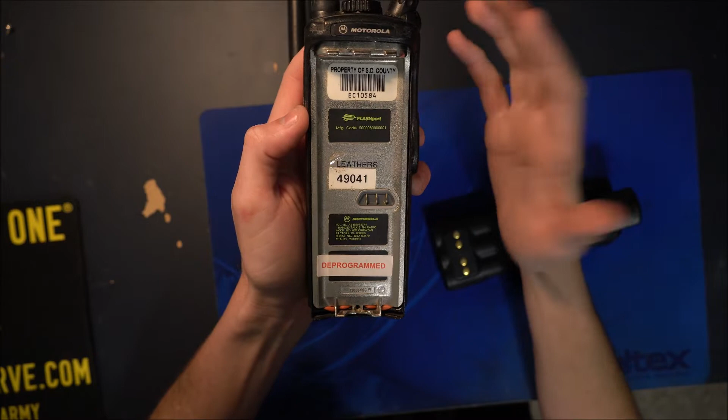This one has been flashed, but they removed the sticker that tells you what flash version it is. Interesting enough, when you see this sticker that says 'I've been flashed,' that's not from the factory. From the factory it's a black sticker that shows Motorola. This icon or sticker shows the most recent flash code - it says flash port manufacturer code, and then gives you the digits. That's pretty much what you get from the manufacturer.

But when you send it out to a third-party company, like a radio company or some other people that do radio flashes, you will see the sticker on it that says 'I've been flashed.' That basically means they updated the flash code. So the original flash code that came from Motorola has been updated to a newer standard or version, and the probability of it having more bells and whistles is a lot greater, because usually when they reflash it, it's to upgrade certain characteristics of the firmware.

Alright, so let's get to it. So what you're going to need for programming these radios is an old dinosaur laptop or desktop, doesn't matter.

The key with the computer is it has to be running Windows XP. If it's not running Windows XP, it's not going to work. The program will boot up, but it will not recognize the radio at all. I don't know what that is caused by, but it's just the way it's been for a while.

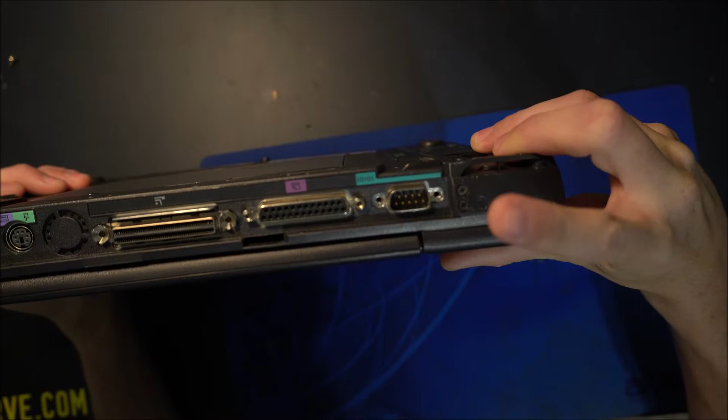Preferably, if you get a computer that has a serial port on it already, then you're pretty much in the ballpark of where you need to be. So a serial port is nice to have. If you don't have a serial port, it's not a big deal. You can buy these on Amazon for like $10, and it's a USB to serial port adapter, so it's the same port as the one that you need.

As far as programming cables, we have this guy right here. I went over this in the last video. This is a serial to XTS 3000 radio adapter. I believe this will also work for the XTS 5000 and 2500. Do I have proof that that works like that? No, but I'm pretty sure it does because the pinout is the same. Notice there's no rib box in the cord, and I said that in the last video. There's no need for a rib box. Just go buy the serial to radio adapter directly.

So we're going to turn the laptop on here. This laptop is so old the battery doesn't actually work, so it has to be plugged in at all times. The only thing I use this for is programming Motorola radios. It does not get used for browsing the internet because it is ridiculously slow.

Alright, so when you get the computer all booted up and ready to go, you're gonna take the serial port and go ahead and plug that back into the back of the computer. Then you're gonna place the radio side of things here. You're going to plug in the adapter to the radio, like so. That's what it's gonna look like once you have it connected.

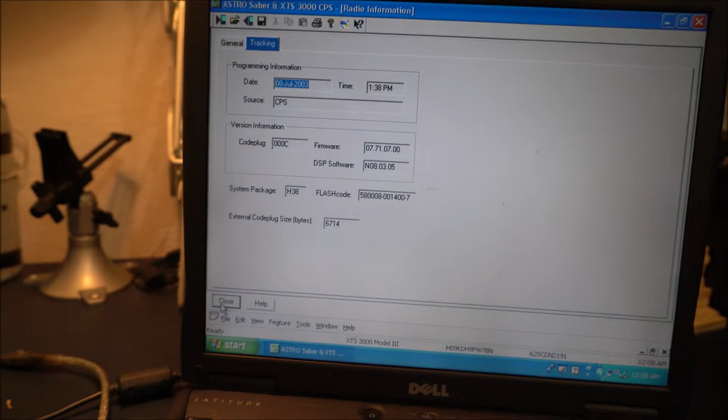So that's all you can do with the first tab. I'm going to go down here to the bottom left under close, and go to radio configuration. This is a really important tab.

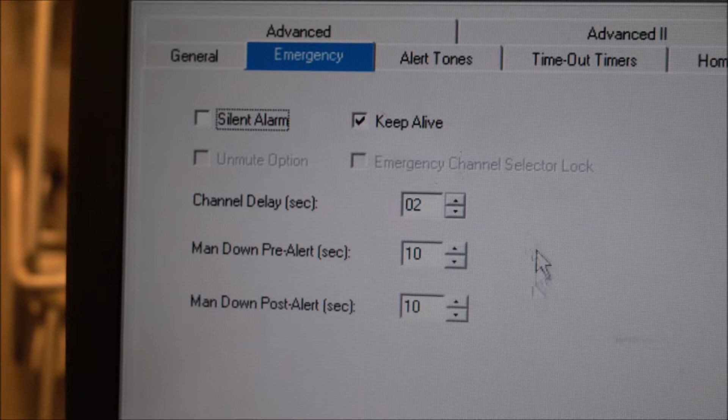So under radio configuration we have radio wide. Radio wide is pretty much your general options, TOT timers, which is timeout timers, tones, emergency systems. Right here, you can dictate what the radio is going to do when you hit an emergency button or an E-tone button.

Normally, for a firefighter or officer, the emergency button is this orange button here. But this orange button can be programmed to do anything I want it to do, and we'll go into that here in a sec. So, depending on the department, they have different things.

We have surveillance mode. Never going to need to use this, but what this does is, let's say I am a surveillance guy or I am investigating a case and I need to be very discreet. I can disable lights on the radio, which means that when I touch the keypad, the lights will not turn on.

I can disable tones. What that means is when I click a tone or I click a button, you hear that tone - it will turn that off. And then disable internal speaker audio is another thing that you would have off. What that does is it disables the general speaker on the front of the radio, and it will only output audio through a microphone or a headset.

So if you're doing investigations or you're an investigator or something, this is what you'd want to use. This would keep you very quiet - it would not make any noises. Right now it makes all sorts of beeping noises because it sounds cool.

Home mode - this has to do with, I believe, more of a trunking thing. But this is also, so if I click home mode, it will automatically give me an option to select which zone and channel that this will resort to when I turn it on.

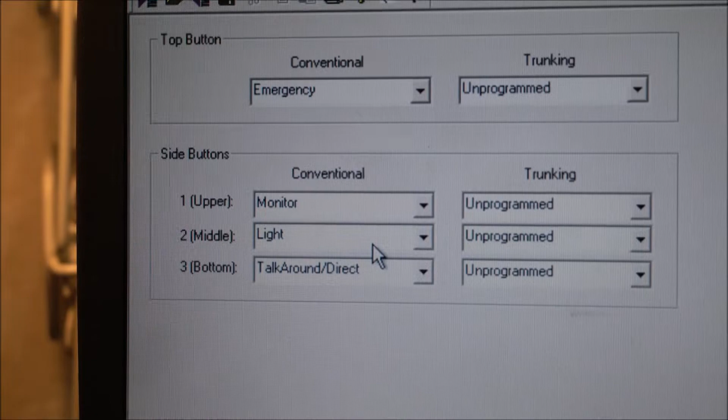So on conventional, which is what I'm doing, the top button, which is the orange button on the radio - I'm going to take off the antenna so I can get an easier view here. So the orange button is the top button, so that's my set to emergency.

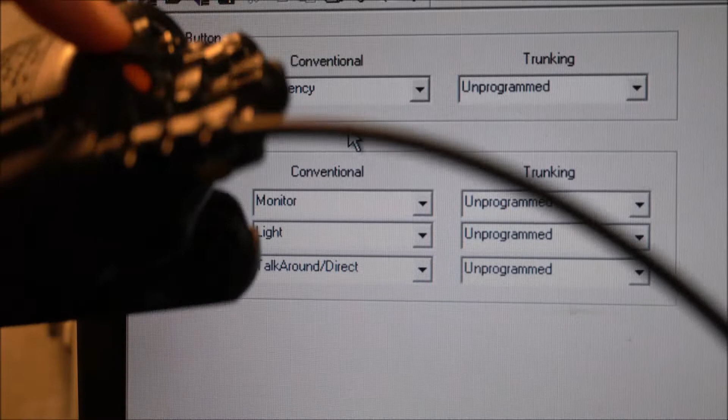Now check this out - let's say I don't want that to be my emergency button, I want it to do something else. I have all these options to set. So I can set this to phone, and what that does now is if I click write to radio, when I click that orange button, instead of activating an emergency tone, it's going to activate my phone patch on the radio. So I keep mine on emergency, but you have tons of different things here.

So we have light - light just turns on the backlight on the radio. Monitor monitors frequencies. Obviously, talk around direct is direct, which means non-repeater. Emergency mode. Phone, like I said, dials a phone number or opens it up for auto patch. Unprogrammed, which doesn't do anything. Select call, which basically answers a call when you get a call on a trunking network. And there's just tons and tons of options here.

I'm not going to go into all of these, but that's just generally what they do. I'm going to change this back to emergency.

Okay, so then we have side buttons. The side buttons, you'll see upper, middle, and bottom. On the radio here, we have upper, middle, bottom. So that's pretty simple to explain.

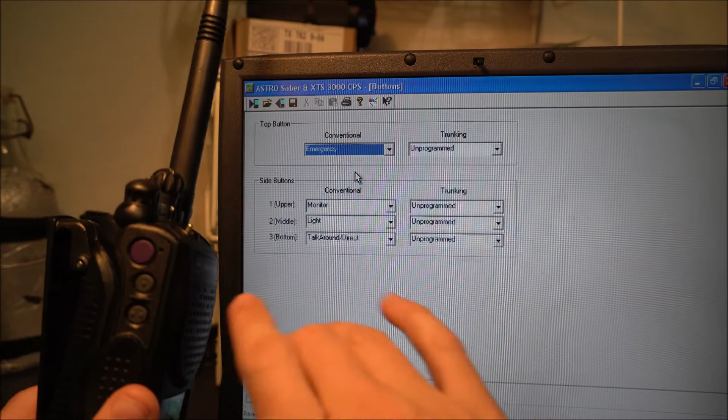So basically what I have right now is when I click number 1 - let's turn the radio on and let's go through these. Once you read the code plug on the computer, you don't have to have the radio connected to the computer. My upper button is monitor. What that means is when I click my upper button here and hold it down, the radio will openly monitor analog. This button is set to monitor, which it's going to bypass the squelch and you're just going to hear white noise.

My second light here, or my second button, turns on my light. So right now I have no light. Hit the second button, my light turns on and off.

So when I click on 3, or my third bottom button, you see a little icon that opens up, and it's really hard to see on this camera. This little line with an arrow means that when I transmit, it's going to go to direct mode, and it's not going to go through the repeater. So whatever your receive frequency on the repeater is, it will transmit only on the receive frequency, and it will not do your offset when you have direct on.

So basically, this is simplex. When you click this button here, the way I have it set, you're turning the simplex option on and off. So that's all the buttons - they're not that difficult. Like I said, each button on this system on the radio can be programmed for different options. That's just what I have mine set for. So close that out.

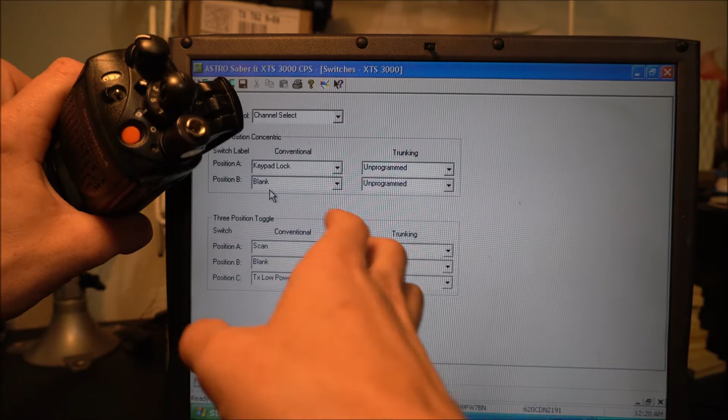Anyway, there's a better view of it, so you can see what I'm moving. You have a thing here that looks like an O, and on this side an O with a cross through it. That's mainly for secure net, which is what Motorola prefers it used for, but I'm just using it to lock out my radio. When I have this set to my left position, the number pad is completely locked down and I can't press any buttons, which is really nice because when I'm running around with it on me and I hit something, it doesn't change a setting.

So that's what that is for, and you can change it to do multiple different things. Like I said, I have keypad lock right now, but you've got zone select, scan, unprogrammed, blank, PL disable, change to low transmit power, scan list, mute, secure TX, which is what it was originally on.

3-position toggle. You see here, 3-position toggle A, B, and C. So we have 3 little positions here on the radio: A, B, and C. And we have a toggle switch that will actually click into 3 different positions. So here's 1 in A, 2 in B, 3 in C.

Once again, fully programmable. We can change what every little button does on this. So right now I just have my position A to scan the zone, position B is blank, and position C is TX low power. That's what I've set everything to. This isn't trunking, but it's the same theory - you can program any of these in for trunking.

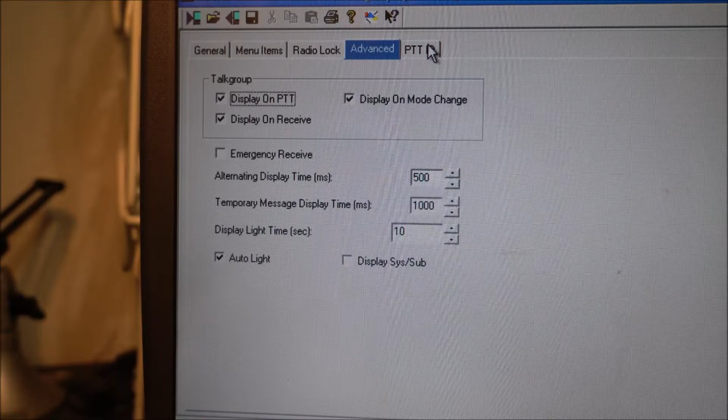So this is pretty simple, don't get overwhelmed by it, there's really not much to it. There are 2 different options for people who like different methods of programming. So if we double click on conventional personality - a conventional personality is an actual physical channel, it is not a zone. A zone and a channel are 2 different things.

A personality is a repeater pair. For example, my repeater here at the house is 440.625, my transmit to the repeater is 445.625, and my PL is 103.5. So that would be a personality.

The personality holds - let's go to the information here. When I click on a personality that I have set, you can see I have my frequency in megahertz to receive on, and my transmit frequency that will be transmitting to the repeater, and that usually is the one with the offset. So a personality is a channel or frequency pair, and a zone is the group in which those pairs or personalities are being stored. We'll get into zones in a second.

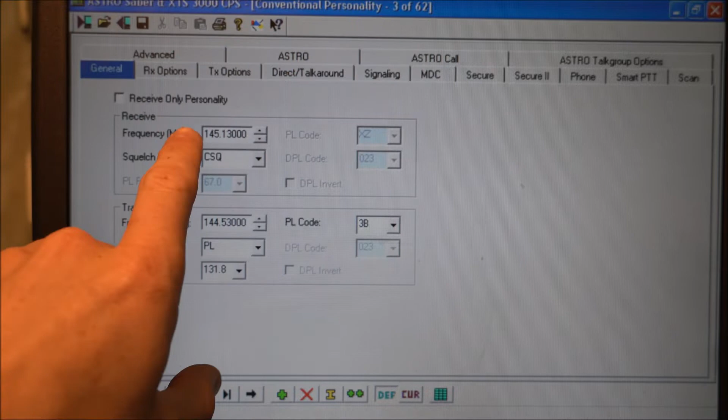So we're going to go through the two different ways of going through the channels. First mode we have is basically tabs - I don't use this often, I prefer the chart, it's kind of like an Excel doc almost. But if you prefer this, it's pretty simple.

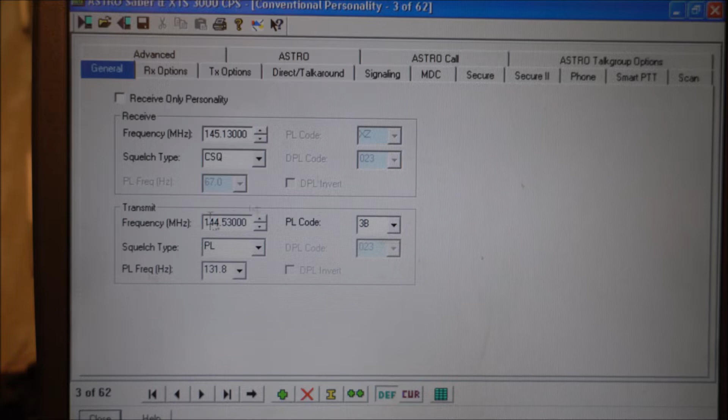Let's go ahead and I'm going to program a repeater frequency that is pretty local to where I am. We're going to reprogram this personality, and I'll show you how to do it from scratch.

So close this - here's all my personalities. I usually like to click on the last one, it doesn't matter. Down here on the bottom, you will see this little add button, this little green cross adds personalities to the radio. If I click this, it's automatically going to add a channel.

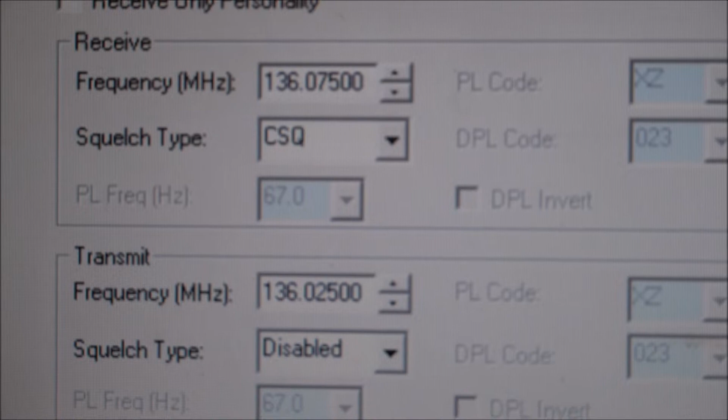By default, the channel is always set on this radio for 136.075 and 136.025. However, that's not what we're needing to program into the radio. So my receive frequency on this repeater is going to be 145.130, and let me see what my transmit frequency was.

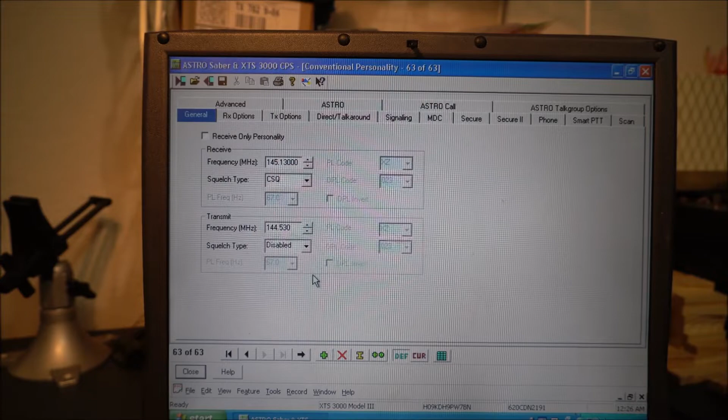144.530. Okay, alright, so my transmit frequency is 530, so there we go. I just typed in the repeater pair. So the radio is going to receive on 145.130, and then the radio is going to transmit to the repeater on 144.530.

Now, squelch type, we're going to go down here to PL, because that's what this repeater takes. And the PL, I believe, is 131. Oh, we got 131.8, I believe, is the PL.

So PLs also have what's known as a PL code, so these are dependent on each other. Whatever you type in for one will change the other, and if you type something in for that, it will change this. I don't know what the PL code definitions are, but I know the PL frequencies.

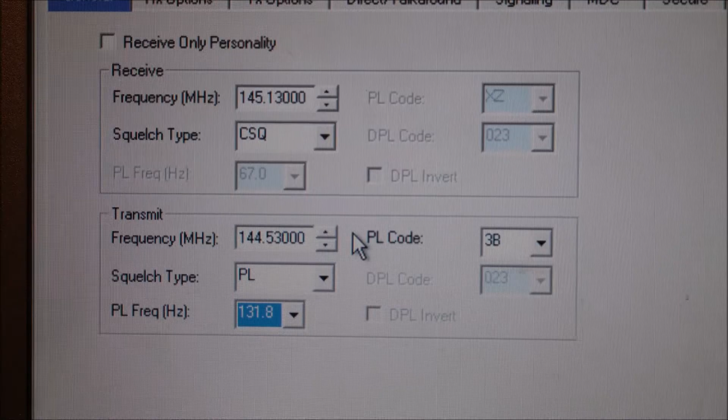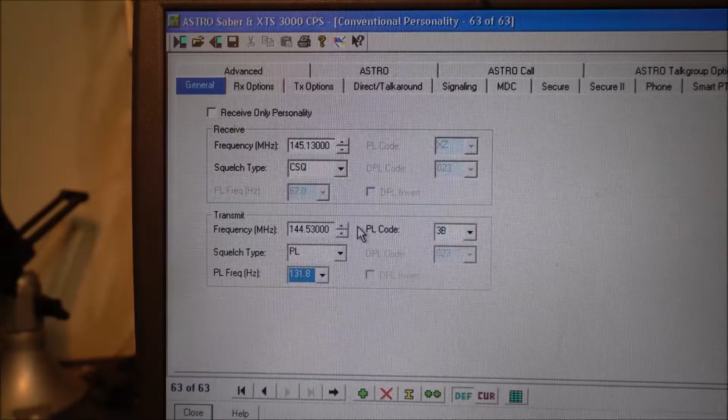So we're pretty much done programming this repeater, but we're missing one major thing here. We programmed the radio to operate on this repeater. However, if I was to program the radio right now and send all this data to it, it would not find this, because we have not assigned this to a zone. So right now this is kind of in the radio, but it's not accessible to the user yet. To assign this to a zone, we have to remember this number down here.

So this is personality 63. Total personalities in the radio is 63. So we have to remember that this is personality 63, and you're going to figure out why here in a sec.

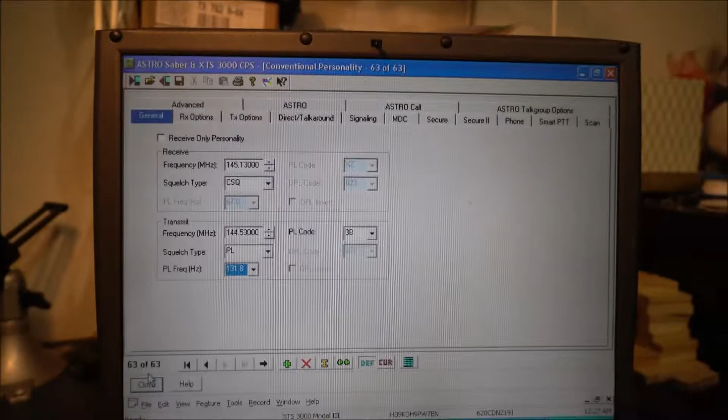Now, on the conventional channels, we cannot program the name of this personality just yet. That will be done when we get into the zones. So we're going to go over to the zones here real quick. On the bottom, underneath personalities, you see message alias, status alias, MDC, scan, zone, channel assignment. That's what we want. So here I have all my zones.

We're going to go ahead and click the bottom one, and add a new zone. So this one, I'm just going to call it TST for test, or video. Let's call it VID for video. So here's video. All right, close. Or actually, don't close it yet.

So we named the zone. We'll go over how you see zones in the radio. Now we're going to go up to channels. As you can see, there are no channels yet assigned to this zone that we have just created.

So our personality type is conventional. Once again, we have conventional and trunking. We want to stay with conventional. Personality, remember that number 63? That's what we need to remember. What this does is, this personality number refers to all personalities in the radio.

So we're going to go down to personality 63, which is what we were using. Click on personality 63. Now we have told the radio in this zone we want to use channel or personality 63, which is that repeater we just programmed in.

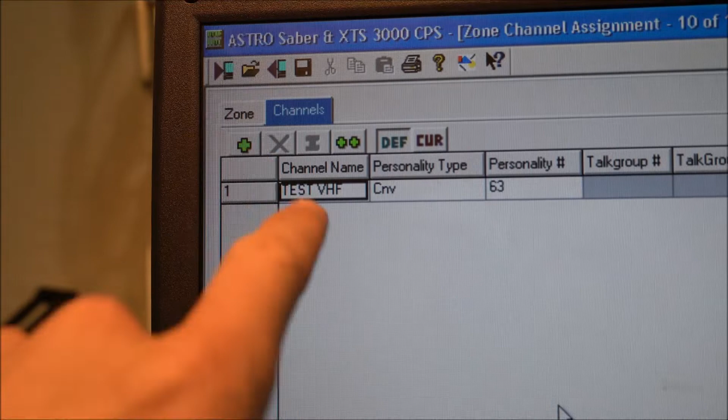The personality type is conventional, we are not doing trunking. Personality number is 63, which is the channel we just programmed in the personalities. Okay, so now we're going to close all that out. Basically, we just programmed a brand new zone with a channel.

So if I go to my radio, same thing, I'm going to turn the radio on. The radio's already plugged into the programming wire. So radio's on, it says radio locked.

Now we're going to go back over here. We're going to go to, so this was our read button, this is our write button. So we're going to go ahead and click on write.

The radio beeped, recognizing it's taking data, and it will also say 1 CSQ here. Once the radio is done, it will actually give you a notification on the screen. Right now it says, verifying that the device can accept the current code plug. Using port COM1. The radio has completed. Astro Saber XTS 3000 CPS. Write successful. So now the radio has turned on.

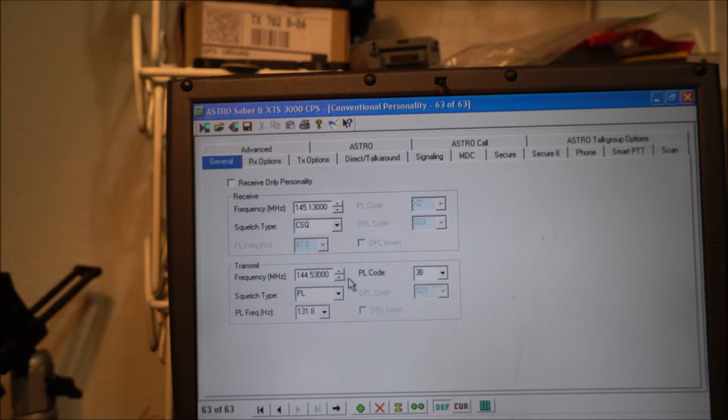So we're going to go back down to personality 63. Here is our analog personality that we just programmed. And now, instead of going through this tab section, we're going to open up the chart view. The chart view is what I use to program frequencies. It's just a lot easier to see things.

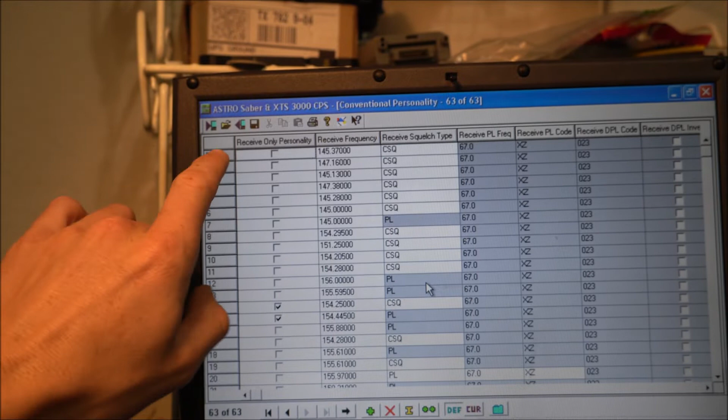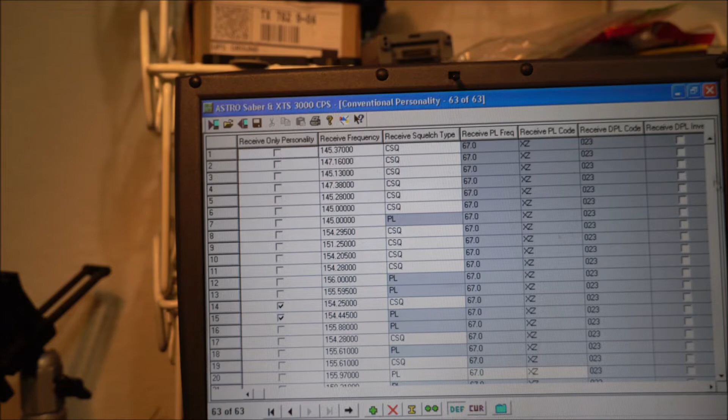Takes a while because I have 63 channels. So here it shows all of my personalities designated by a column ID or personality ID, and it also shows my receive frequencies programmed in for each section. So if I go down here, we'll see at the bottom that 145.130 frequency that I just programmed, which is channel 63.

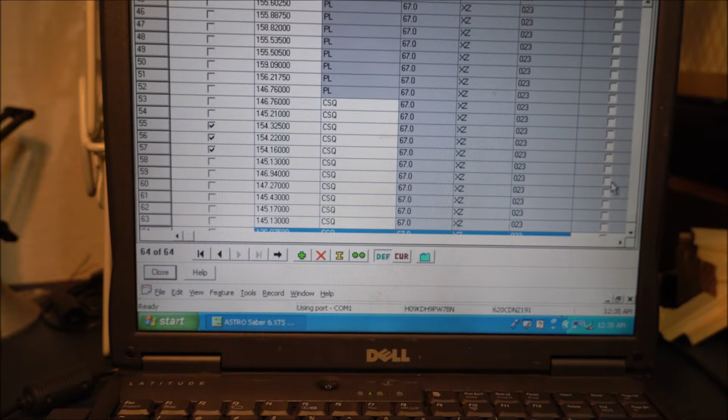So we're going to add 145.130, but we're going to add this in P25. I'm going to click the button down here again, which is the green cross looking button, and it's going to add another channel. Again, the channel defaulted to 136.075. That's just what the radio does.

So on the receive frequency, which is right here, their column tabs are up here. So we have receive-only personality, which you only highlight receive personality if you're doing scanning. So I got receive personality, receive frequency, receive squelch, PL, all that. There's tons and tons of tabs. We'll go through the basic ones here.

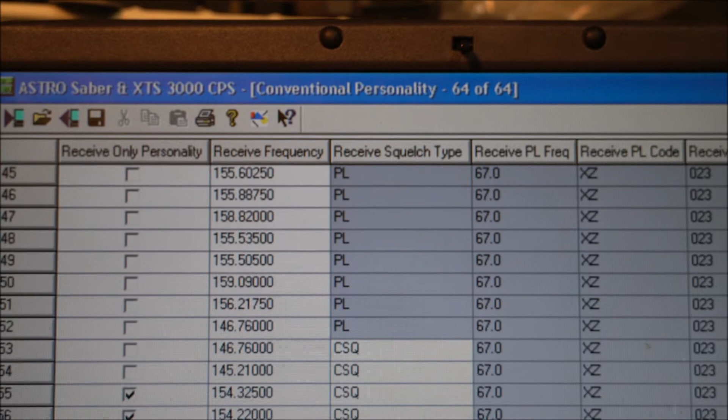So same thing, we're going to program 145.130. All right, we are fine with CSQ on receive. That doesn't really apply to what we're doing right now.

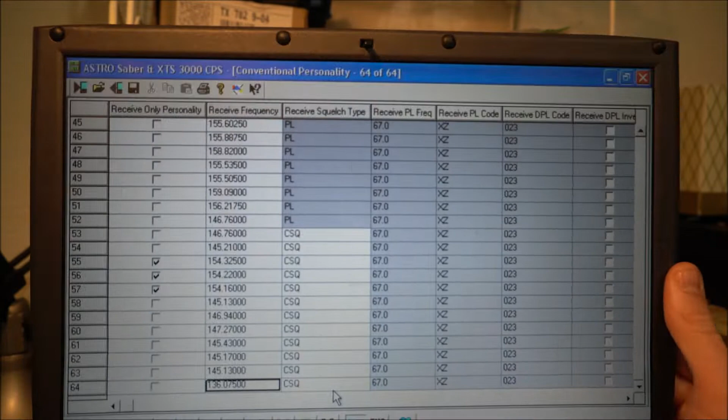Go over to the right a little bit more. Here's our transmit frequency. To the repeater, our transmit frequency needs to be 144.530.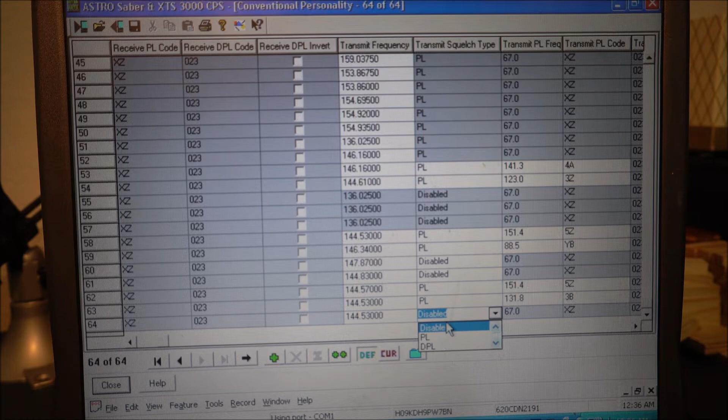Now, if we were doing analog, we would need to change this to PL, but we are not going to be doing analog. We're going to be doing digital, so I'm going to keep that disabled. As you can see, all these are grayed out because they don't apply to the conventional channel we are working on.

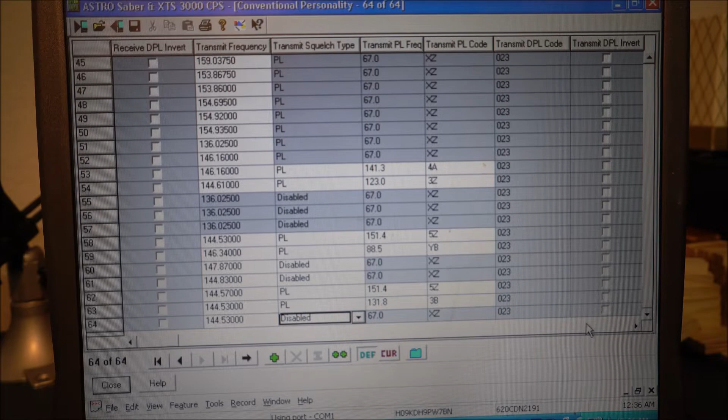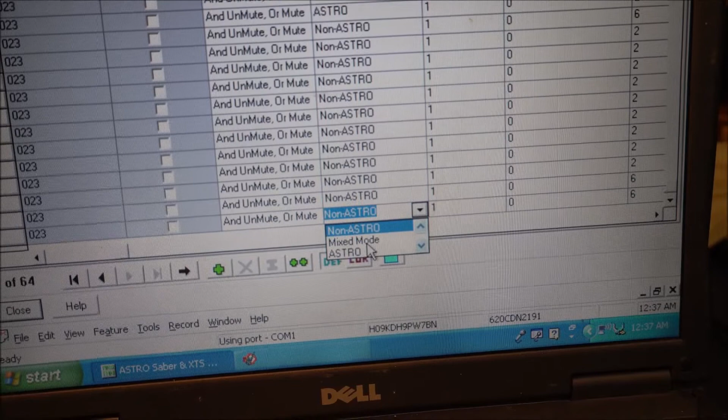Okay, so here is pretty much the guts of where we're going to program in P25. Non-Astro means analog, that's what that means. We have three modes: non-Astro, mixed mode, and Astro mode. Astro mode is our P25.

Mixed mode is basically duplex between both modes, so it will receive analog and it will receive P25, and it will recognize what it needs to transmit to the repeater too. I don't know how it does that, but that was one of the things in the user manual that the radio was capable of doing.

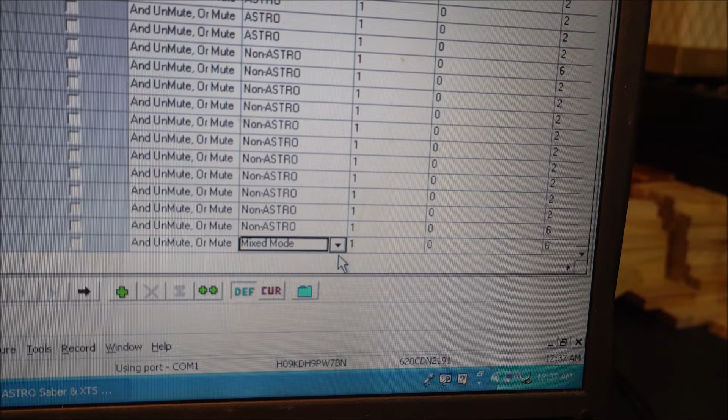So we're doing Astro on this mode. It's going to take a second to change everything to Astro. Now we are in Astro. So now when I transmit on that frequency, it's going to transmit on P25.

So we're going to go up here now and keep scrolling over. So here we have our squelch fine tune. I normally keep these at 2, so I'm going to change them all to 2 here. The lower the squelch, the better the coverage in some cases. By default, these are at a 6 because that's what the radio defaults to.

So Astro, okay, we got our PL, or our squelch, now at 2. Going over here, here is our timeout timers. Our timeout timer is identified by numbers, or seconds. So right now a 3 is 60 seconds, and both channels we have at 3.

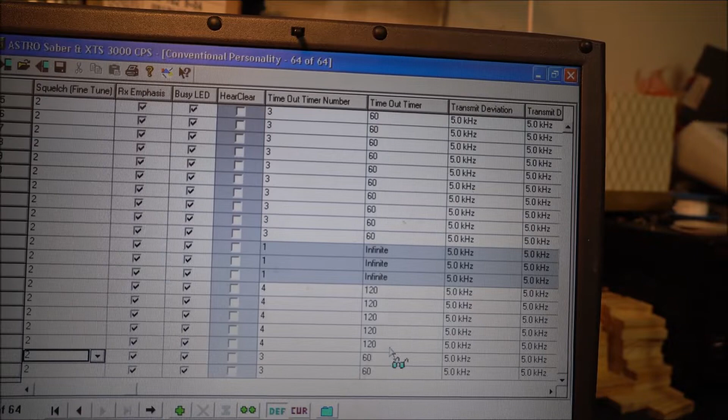So for those of us that like to rag chew, you probably want 120, so that would be 4. 4 and 4 - that gives us 120 seconds of transmit time on the radio.

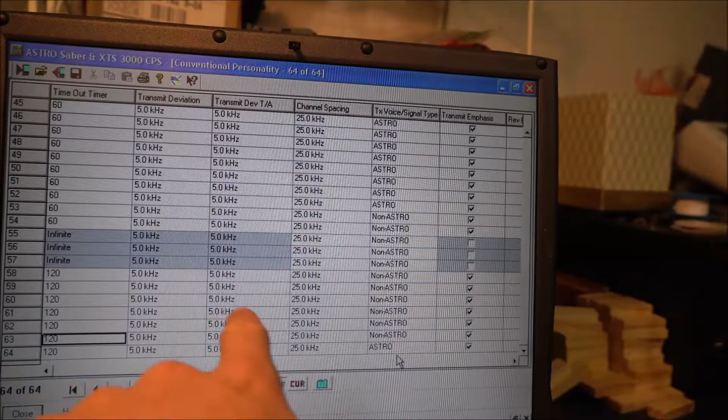All this right here is just deviations, and that is useful for ham radio, obviously, when you are transmitting ham radio. Actually we should have set this - 5 is probably our best bet, because that's as close as we're gonna get. Once again, we got TX voice signal as Astro, which is P25. All this is automatically highlighted when you select P25.

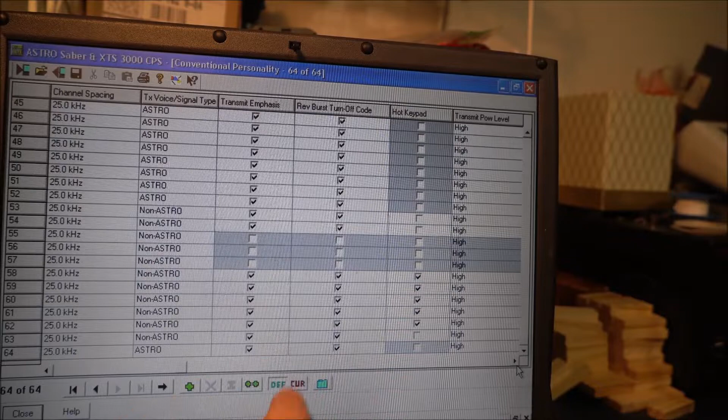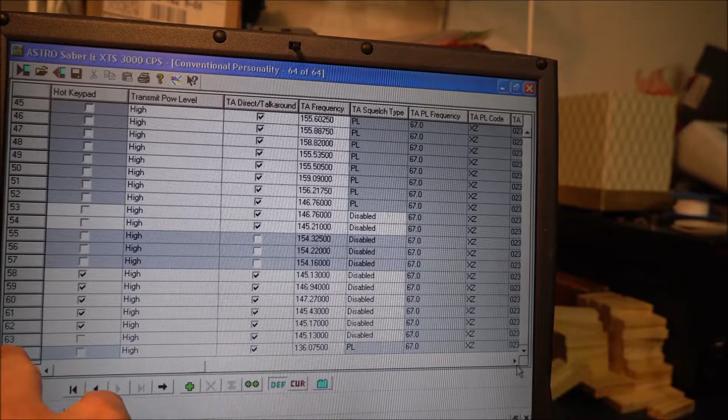Here's where we program our direct talk around frequency. Our talk around frequency on channel 63 that we programmed earlier is 145.130, and we have to change that here in a sec, but I'm going to keep going down the line. So we have a lot of options here.

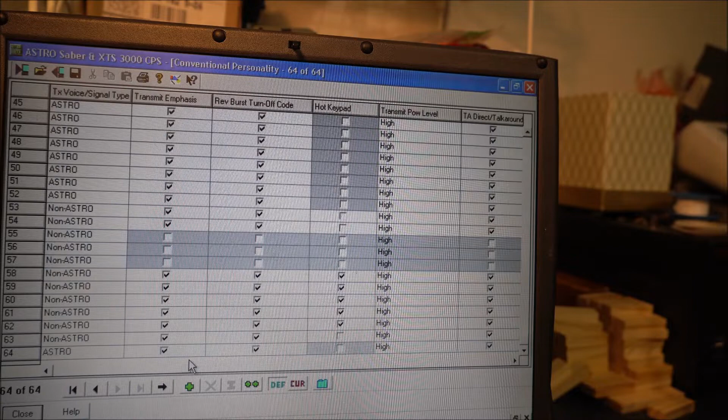There's something I do want to show everybody that's very useful when you're using a Motorola radio. Let me see if I can find it. This is probably one of my favorite options on the XTS 3000s.

Here's our phone operation, so we can determine if the phone is going to get used on that channel. Okay, here's what I was looking for. So here we have Smart PTT type. This is always used on all of my repeaters.

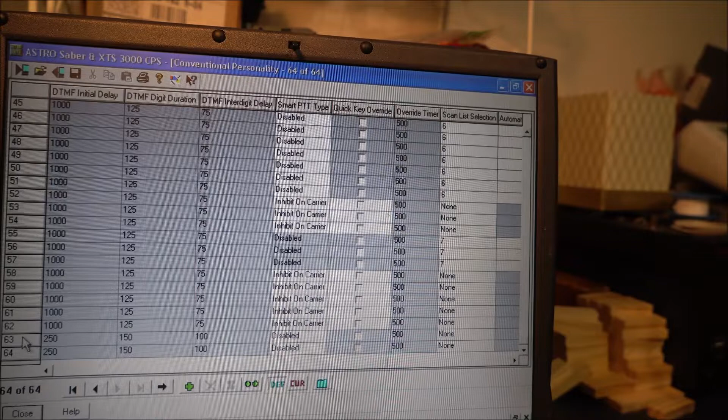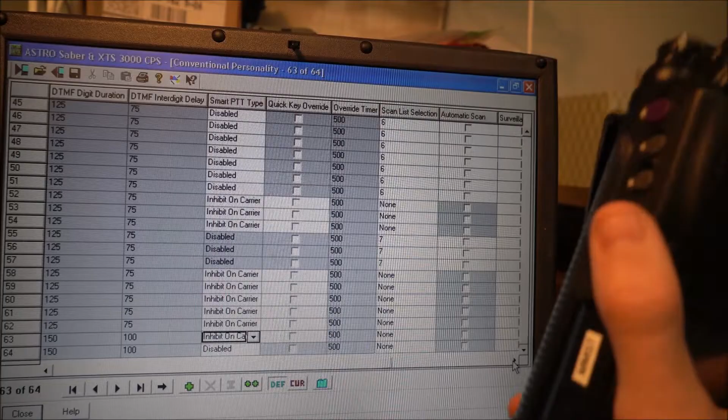Here's why. On channel 63, which is what we just programmed, you'll see it says disabled. I always set this to inhibit on carrier. What that means is, let's say I'm on an amateur repeater in my area and I want to talk on that repeater, but there is somebody on that repeater talking. This basically prevents doubling. When the radio detects a carrier, or when it's inhibited on carrier, it will not allow you to transmit unless you're in emergency mode.

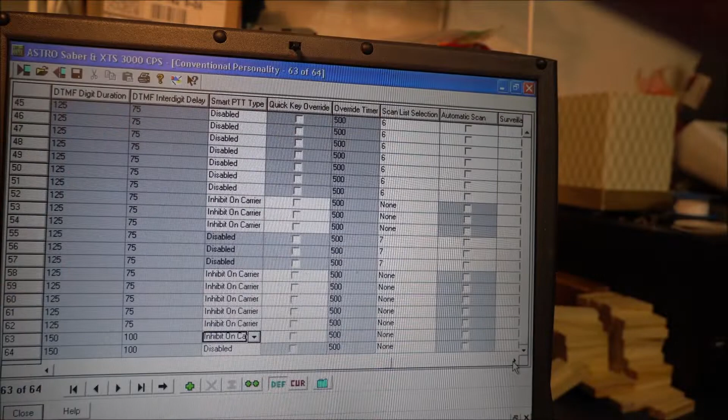So let me open this up. If these guys are still talking, I'll go over to that channel and show you what that works like. It's generally on digital, otherwise I've got a PL of 114.8.

Alright, so here's a repeater. If I transmit on this repeater, these guys are talking. See how the radio beeps, but it doesn't let me transmit? See that? That is what inhibit on carrier does. So no matter how many times I hit that, it's not going to let me transmit because the repeater is already being used.

Now if I go to a different repeater, like this one we were just on, now I can transmit. That's how it works. So if someone came back to me on this repeater, I couldn't keep transmitting. When you have inhibit on carrier enabled, you will not double with anybody. It's physically impossible. I love that about Motorolas - it's probably one of my favorite features, and it's just an amazing system that a lot of radios should have. So that's what inhibit on carrier does. I'd urge many people to use that.

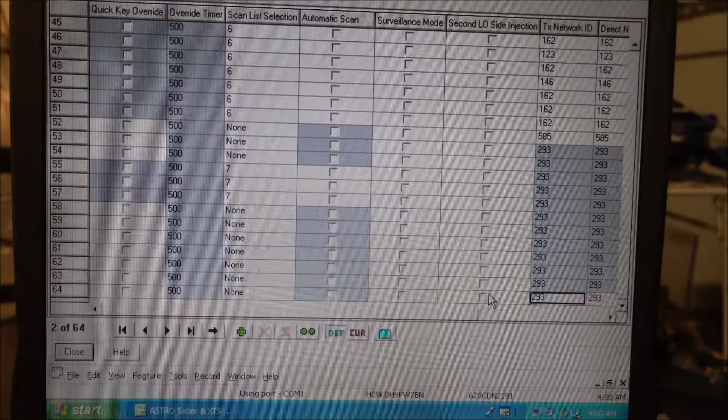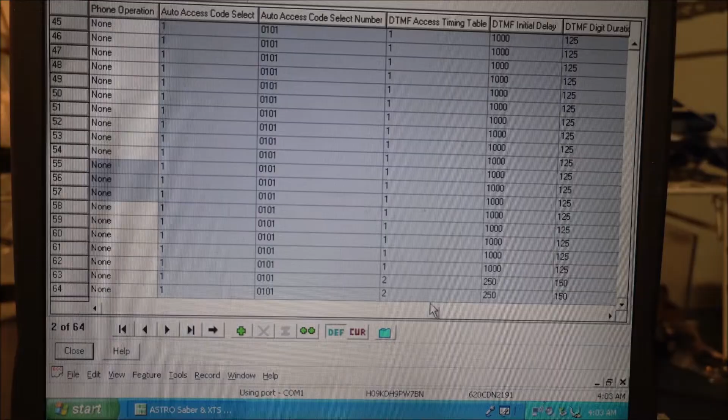Anyway, I'm going to add that to my P25 as well. So next on the list, we're going to look at the NAC codes. If you're going to be using any particular personality or channel using P25 or Astro, you're going to need a NAC code. NAC stands for Network Access Code, Network Authorization Code, Transmit Network ID, Receive Network ID.

There's many different names for it, but basically NAC is like a PL tone to an analog repeater. We're just using it for P25. That's just how they code their repeaters.

On channel 64, you can see the NAC is defaulted at 293. We're going to say that this repeater we're programming - once again, this repeater doesn't exist, but just for the sake of the video - is 523. So you're going to need to put in 523 for all of these, not just one.

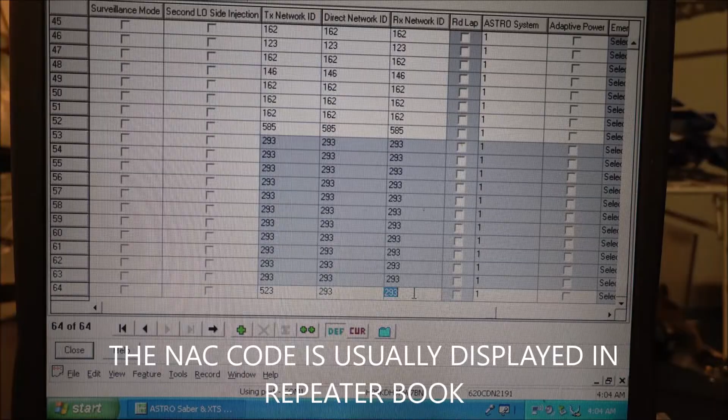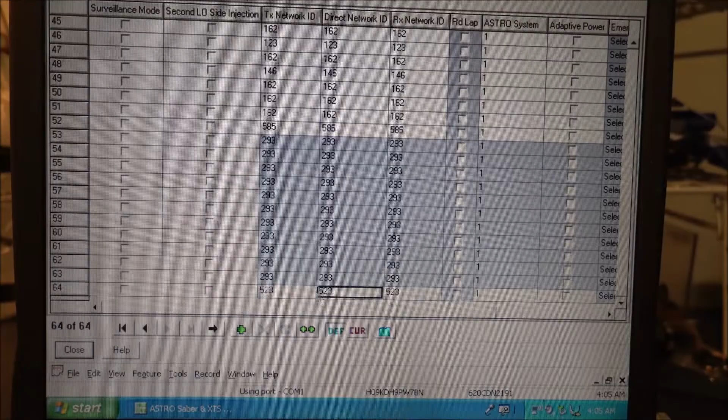When you put in 523 on the receive network, it will automatically adjust based upon what your receive is. So NAC is extremely important when we want to talk or listen on a P25 repeater. If you don't have the correct NAC in any of these portions, you're pretty much not going to hear anything. There is a way to open up the receive, but if you don't have transmit enabled, you're not going to hear the repeater at all. So that is what NAC is.

And for P25 channels, that's pretty much all we need to do. We've got to reset the receive because I didn't put that in right.

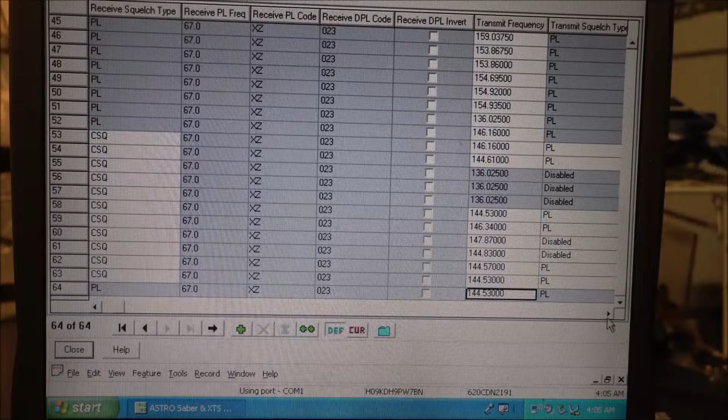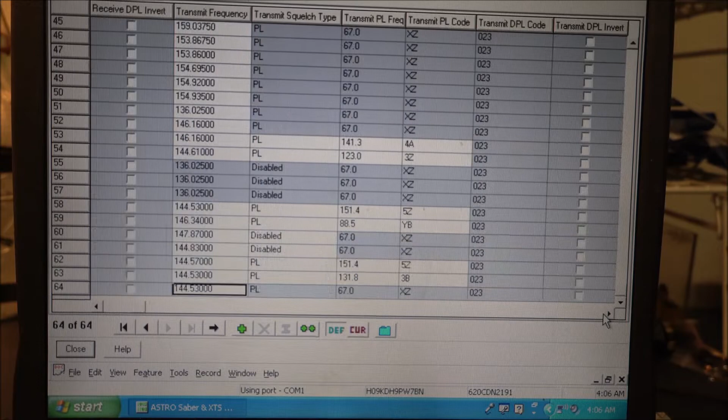Alright, so like an analog repeater, we still have our 145.130 on receive, and we still have our 144.530 on transmit, which is our offset. On Motorolas, you don't need to tell the radio what the offset is going to be. You just tell it what the two different frequencies are, and it will do the calculation based on that.

So once again, just kind of summarizing everything here. Receive signal, receive type is Astro, non-Astro is analog. All of our squelch is at 2, which is fine. Timeout timer's 120, we're good there.

So another thing, if you are using these radios from Motorola, there are repeaters out there where this will tick off the amateur radio guys out there. I don't mind it, I like the way it sounds. Some people really don't like it. I like it, so it is what it is.

But basically what this does is gives that little cop sounding burst at the end or beginning of a transmission. That's what our PTT ID is. So when I press this, the radio is going to make that weird sound, it's basically a data burst. I can't really show you what it sounds like because I don't have a way to relay it, but it's like the movies where they make that sound and then transmit whatever they're gonna say.

A lot of guys on amateur bands prefer you have this off because they think it's annoying. I usually talk with it on because in the event the repeater is set up for analog or it's a Quantar, it will actually recognize my radio via that data burst. So if you want to use that, use it at your own demise if something happens.

So really that's it as far as programming a simple P25 frequency in there. I'm not going to go into detail on encryption or anything like that. Here's phone operation, we went over that. That's about it, so that's how you do the digital stuff.

Now, let's say you don't like this layout here where it has all the little tiles. That's fine because we can go to a different setting. So we were just on 64 on our columns, but if I want to program channel 64 with the tabs, I just double click on it, and it will automatically bring me into the tab page.

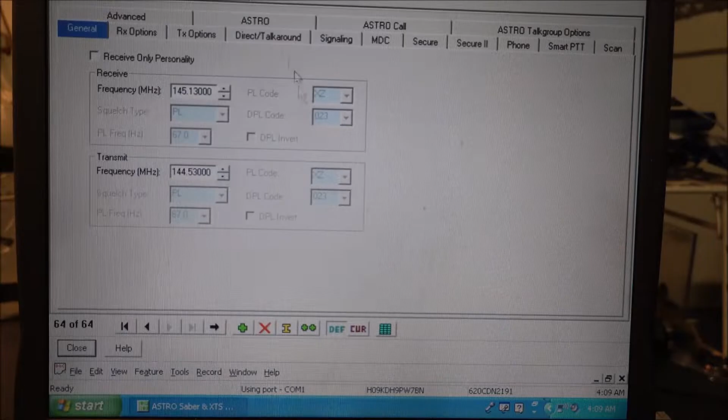And it's the same thing on here. Here's my frequency for receive, frequency for transmit. All this is grayed out. My PL is grayed out because we are on digital. You get to digital by Astro up here. When you click Astro, you'll see that network ID has been set. Digital modulator type is set for C4FM, and we have normal squelch for the radio.

Do not be fooled, C4FM does not mean Yaesu Fusion. It's a very similar codec. P25 is actually the father to Fusion Radio. Yaesu used to actually be a company, part of Motorola, and then they branched off to do their own thing, and they kind of hijacked the code and did their own thing with it. So even though it says C4FM, it's P25. It's not Yaesu Fusion, it's not going to work on Yaesu repeaters.

And then here's our MDC that I was telling you about earlier. There's the signaling, so here's Secure 2, this is the SecureNet system. As a ham radio operator, you're never going to have a use for this. In fact, running encryption on amateur bands is illegal, and you just should never do it. There's really no reason to. If you need to tell somebody a secret, just call them on the phone.

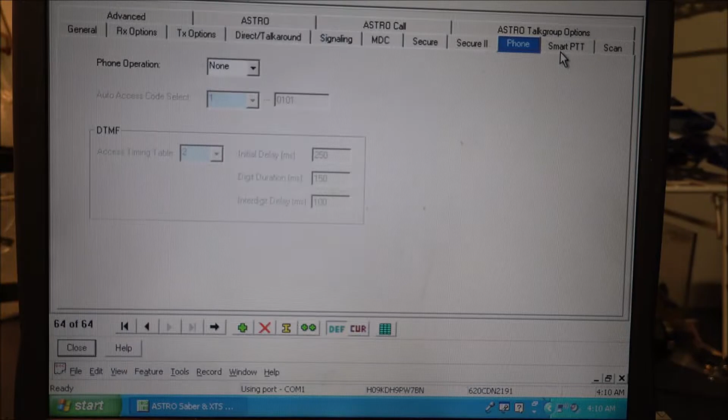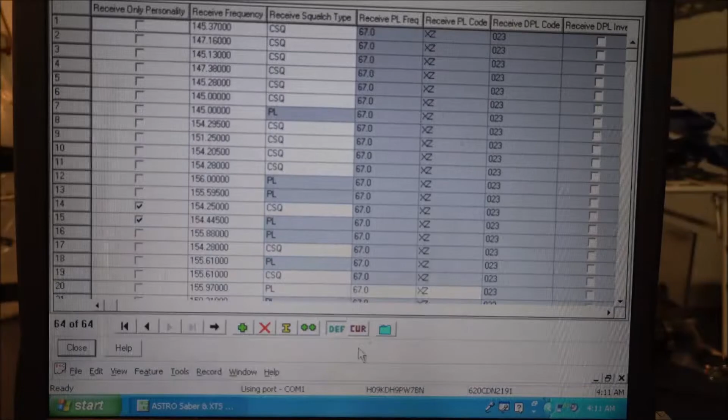Smart push-to-talk type, that's the inhibit on carrier I mentioned earlier. So all of these right here are the same as the columns. I just like the columns better because it's laid out easier and I can work with it a bit better and keep track of all my systems. So there, I'm back in all the columns, and I do that just by right here. If I click on the folder, it'll go to tab view, and if I click on column, it'll go back into column.

All right, so we're working down the list here. We already went over zones. Now if I want to use the P25, once again, I need to remember 64 is my channel. So I'm going to go down here to zone channel assignment, then go to channels, then add.

Now here's the other thing that gets a little crazy. If you click down here on this add button, it will add another zone. We don't want to add a zone, we want to add a channel. So up here is where we actually add the channel. If you click this little green cross, you will add a channel, but if you click the green cross down here, you will add a zone. We don't need to add a zone, we already have the zone here.

So we're going to click add channel 2. I'm going to type this in as test VHF. Let's just do it test P25. And then conventional, we're not doing trunking. Personality type, our personality that we want to use is 64.

So there we go. So now, once we have everything set the way we want it to be, we're going to go ahead and write to the radio. The radio will read its data.

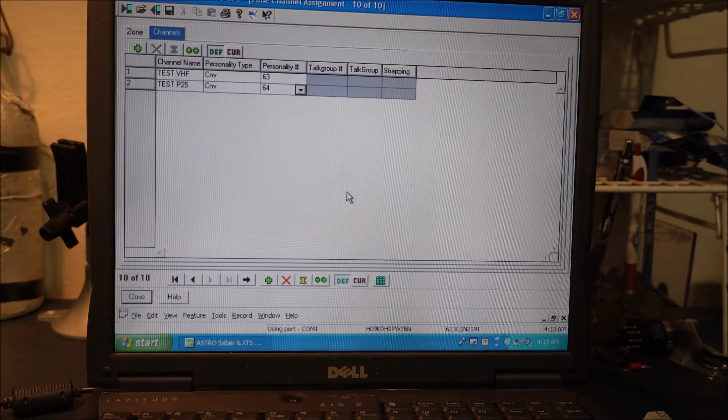Now if we go into our zones, going to click zone, and I'm going to keep going over till I see the vid is the one we just assigned. So here's our vid test. Channel 1 was, remember, we set that to analog, so we have vid test VHF.

That's analog. You'll also note that there is a speaker looking icon, or a microphone looking icon, at the top of the screen. When you see that, you are in analog. When it disappears, you are in digital.

So when I go to my next channel, which is the one we just did for P25, here's vid test P25. As you'll notice, that little speaker icon disappeared, which means that we are actively in P25.

If I transmit, we won't hear anything back because there's nothing to, there's no repeater on P25, but you will see that the red light is transmitting.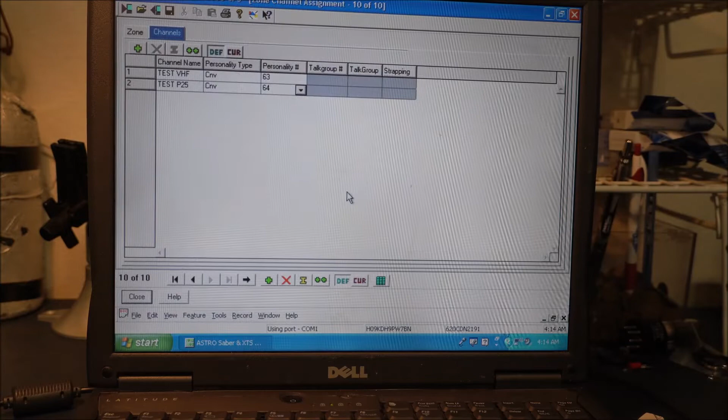And that's really all that you need to do as far as conventional programs. These Motorolas, there's tons of different options. It would take hours to go over, and we're already at an hour on this video, which is way longer than I wanted to do, so I might split this up into 2 different videos. I don't know yet. I guess we can go through how to scan, because that's kind of a good thing to do. Alright, so let's do that real quick.

So scanning, what we're going to do is, let's say we want to go back into our zone that we just made, which was VID, is the zone name. We have channel 63, channel 64. We want to scan these channels. So on my tab menu, and once again this is also the same thing in the other menu of the columns, I'm going to go over to my scan here.

So you'll see here, it says under scan list selection. Scan list selection is under none currently. If I drop down, I have 7 lists to choose from, but these are all for different other channels, so we're going to actually have to go back and make a new scan list. So under trunking, we see this icon here, it says scan.

So we're going to click expand that, and now we want to go to scan list. So here is all of our scan lists. This is very similar to how zone works. So we're going to click on zone number 7, we're going to click on list.

Go to my tab page. So here's all my different zones for all my different scanning programs. Each scan, or each channel, or each scan ID here is for a different zone. So since we just made a new zone, we're going to have to make a new scan.

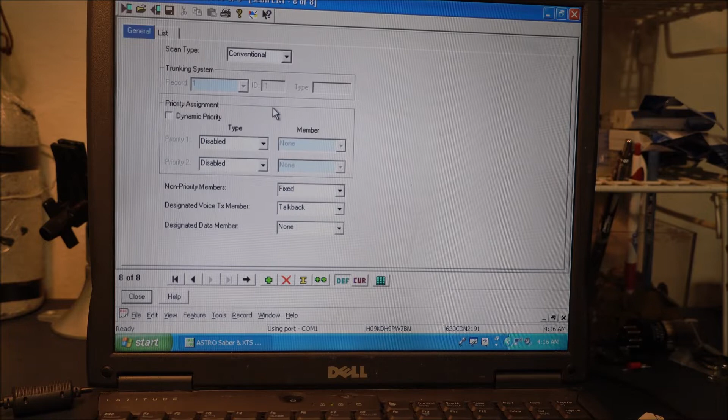We're going to go to list. Now these are all the channels that we can allocate to this new scan zone. So I'm going to put the 2 we just did. So we are in our latest zone, which we just made, zone 10.

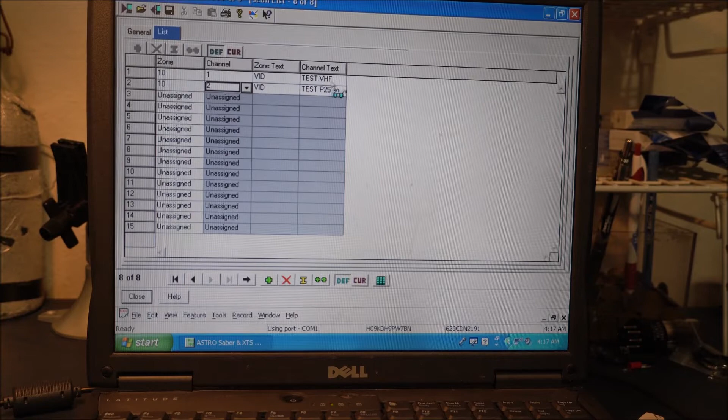As you can see, it's giving me an unassigned error because we haven't assigned the channel—channel 1 on zone 10, and then channel 2 on zone 10. Right there is where we confirm that we have the right channels we're going to scan. So that's done, we're going to close.

Still not done yet though. We have to go into our personalities and adjust 2 things. So in our personalities, we're going to hit 63 like we had, go over to scan, and scan list selection—once again we're at none. Now remember how we only had 7, right? That's because there were only 7 scannable zones that were set. We just created another one, so that's why you see the 8 here.

So basically, we're telling the radio that this channel will go to zone 8 to get programmed. We're going to click 8, click close, go to 64, and also hit scan, and add that to 8 as well. So that's just 2 extra things you have to do aside from the scan zone. Close. Alright, so now we should be right where we need to be. Now that I added the scanning, let's go ahead and upload the code plug to the radio.

Okay, so that's going to fire off here. Okay, we're done, click OK. Here's my radio rebooting—radio's locked, go ahead and unlock it. Alright, so we are back in zone 10, which is what we just made.